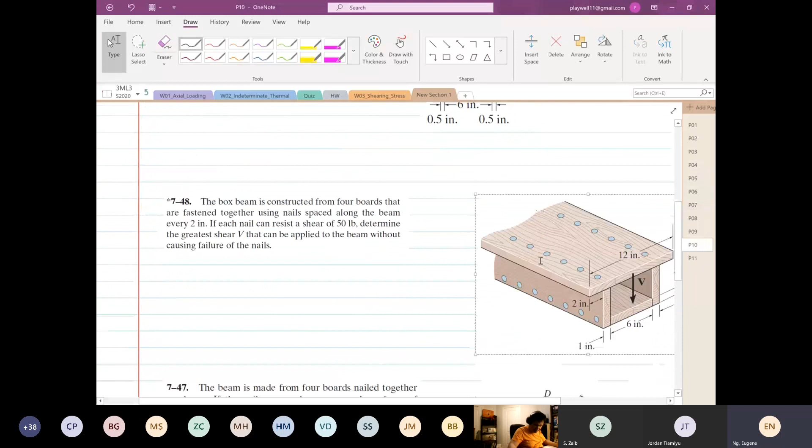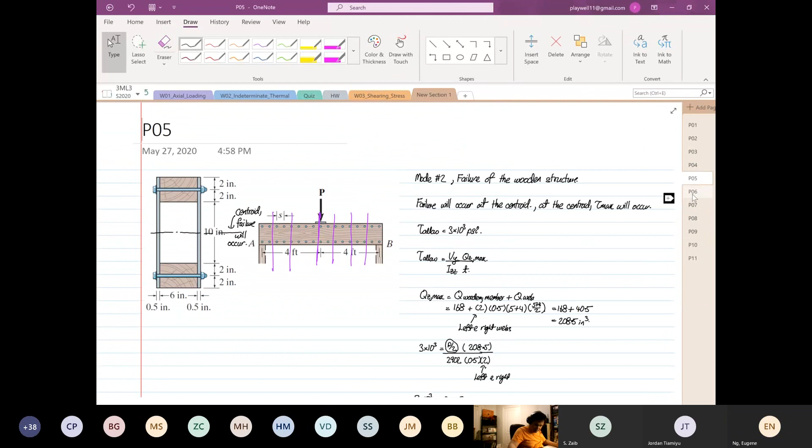Those old textbooks are better than the new ones. The new ones are just pretty pictures, unfortunately. Let's look at another example. Let's look at this one. Okay, let's look at this one. This one's like, whoa.

Eugene, is it okay if you could post practice questions so we could study for our test? Homework are all your practice questions, okay? Does that make sense? Yeah, okay.

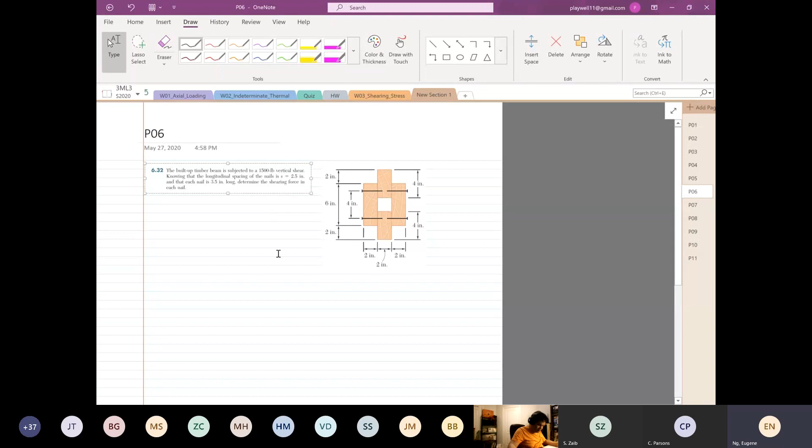Right, so you have this question now. This question states that the built-up timber is subjected to 1500 pounds vertical shear.

Knowing that the longitudinal shear, the nail spacing is 2.5 inch, and the nail is 3.5 inch long. This is just to tell you that the nail goes through the wood. Determine the shearing force in each nail.

Question for you: how will the length of the nail help you? Let's look at experience. I want you guys to know how far it goes into the one in the middle. So what? Is it important? That's what I'm not trying to say.

Really, to know whether it's double shear or single shear. No, this will not work. Also, it's nothing to do with it. Some of you are in civil engineering now, right? So you use a longer nail, a shorter nail.

As long as the nail goes through the part you're holding, you're fine. There's a certain limit, yes or no? There's a certain limit of nail that you need. But if you use a nail that is much longer than the optimum, what will happen? Will it help? Will it stick out? It will not help at all, because what will help is the resistance force.

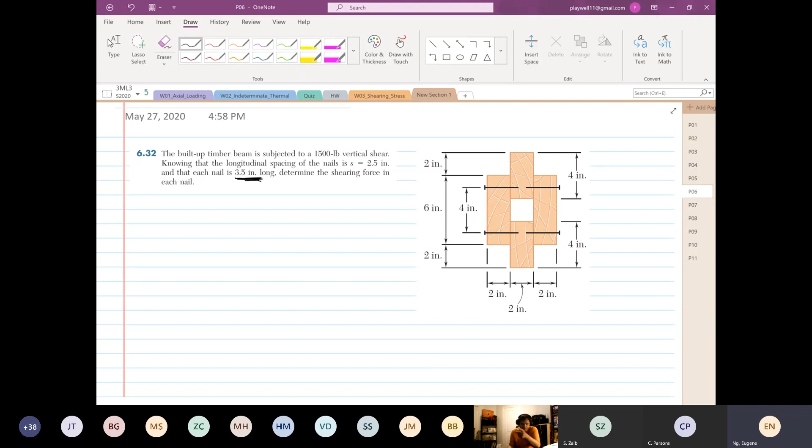As long as the nail penetrates the parts that you're holding, you're fine. You have to make sure that happens. If your nail is not long enough, that's where trouble comes in. So when they say 3.5 inch, we know the nail goes through what? Through the centerpiece also. That's all, it will not help you.

It will not help you in the strength of the structure. It will not help you. Why do I say that? Anyone can point out why do I say that? Why is that statement made?

Show me a formula now that we have applied that has the length of the nail in it. Anyone? Can anyone show me any? None. It's based on the cross-sectional area, and it doesn't matter, as the area is the same. Well done, there you go.

You know what, I did not know that until I taught this. I thought, okay, if this is pulling out, let's go to Home Depot, buy a longer nail. Dum dum dum dum. Does not help. You are better off buying a bigger diameter, yes or no? Yes, there you go, am I right?

Now you are looking at someone that has never built a deck. Most of you have built a deck. Am I right? Yep. Yeah, right? There you go.

That's the beauty of what I hope you all appreciate. That's why I'm so keen on this topic, because I'm seeing things that I did not know when I was an undergrad. I want to transpose all this knowledge to you now, and it's so important. That's the drive, that's why I'm teaching this course and not giving up on any of you.

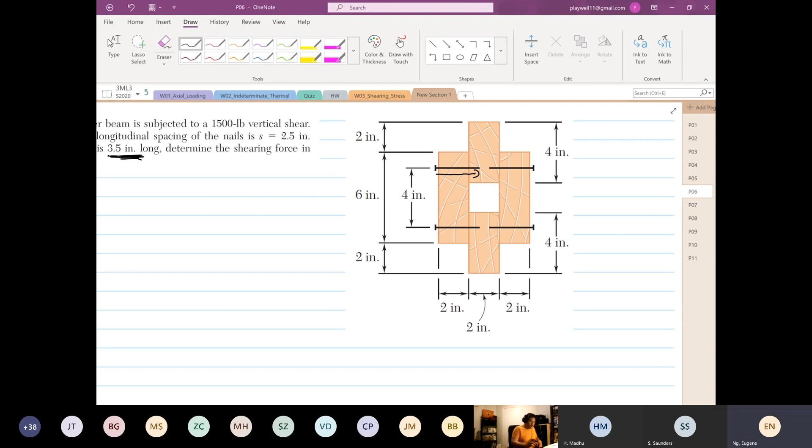Right, so that's why when I seen this question, I thought, what is this? We never had any formula that has the length, but there's an optimum length you need to reach. How to calculate that optimum, I don't know yet.

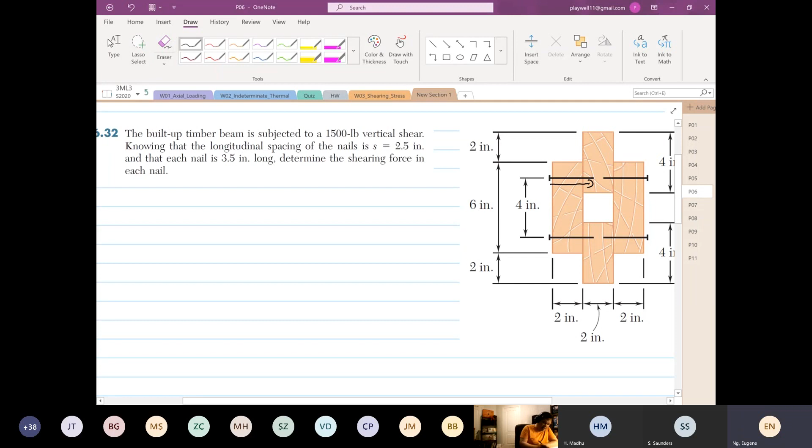So determine the shearing force in each nail. We know that this is subject to a vertical force of 1500 pounds. I'm not going to go through the calculation of the second moment of area, I'm just going to write out the value. I will leave you to calculate that.

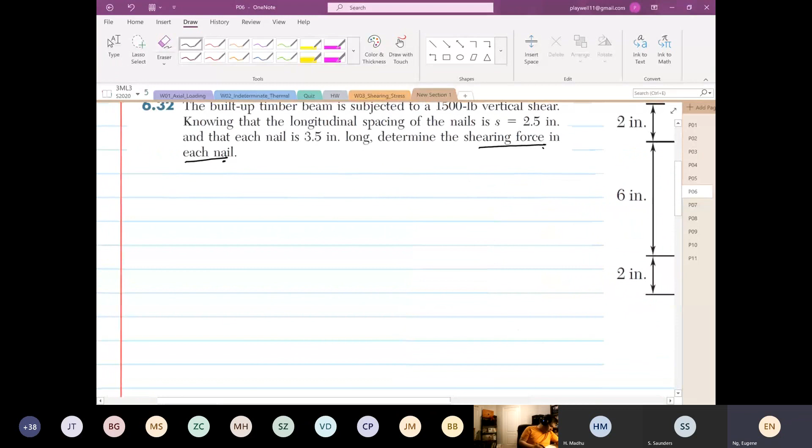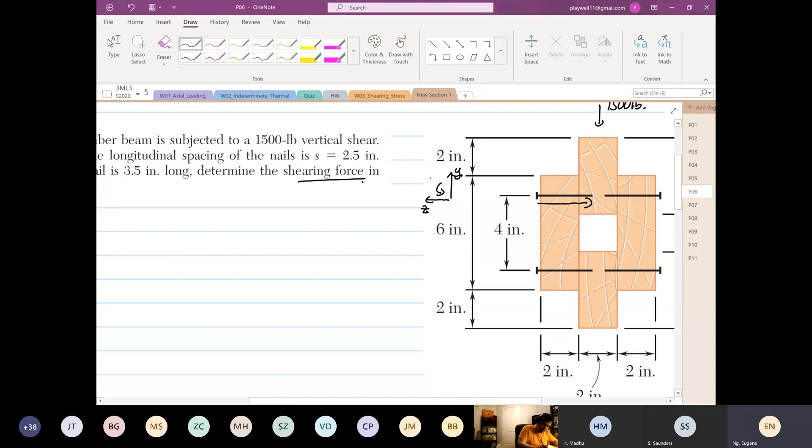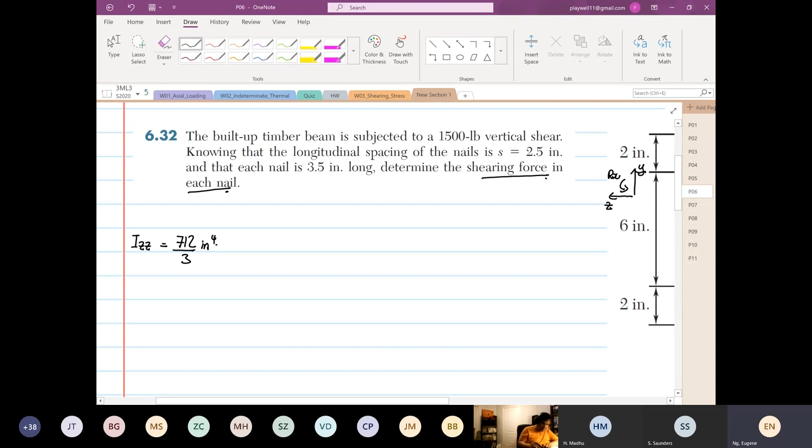So IZZ. Okay, so if we were to use this configuration, this is Y, this is Z, this is rotation about X. So IZZ is equal to 712/3 inch to the power 4. Then this is my centroid.

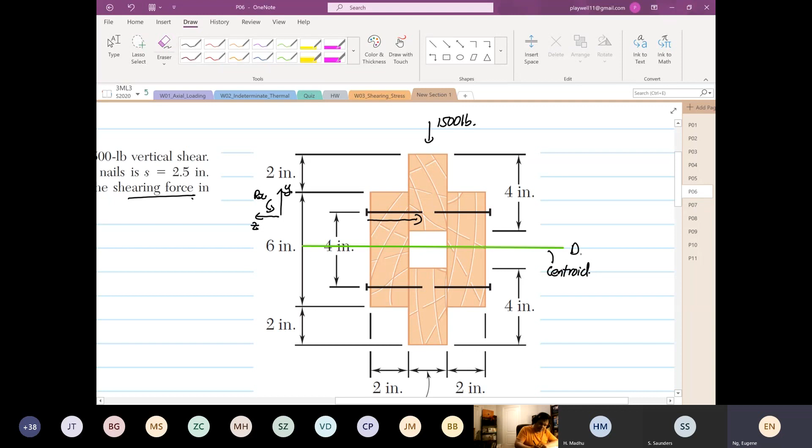That's my centroid, and then this is our datum. This is our analysis direction. Now, question.

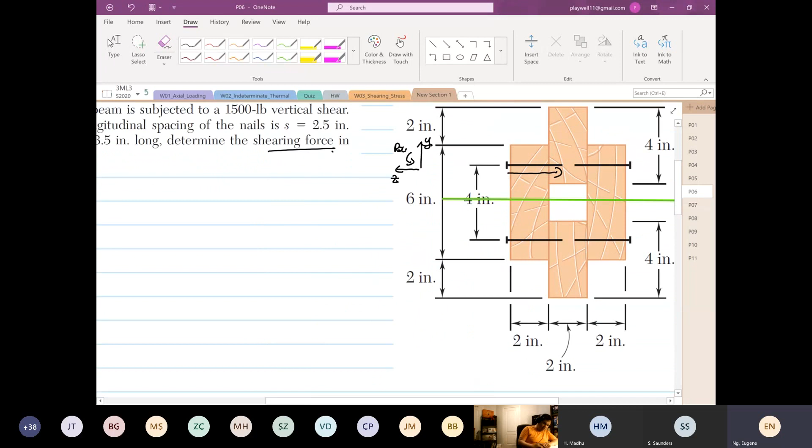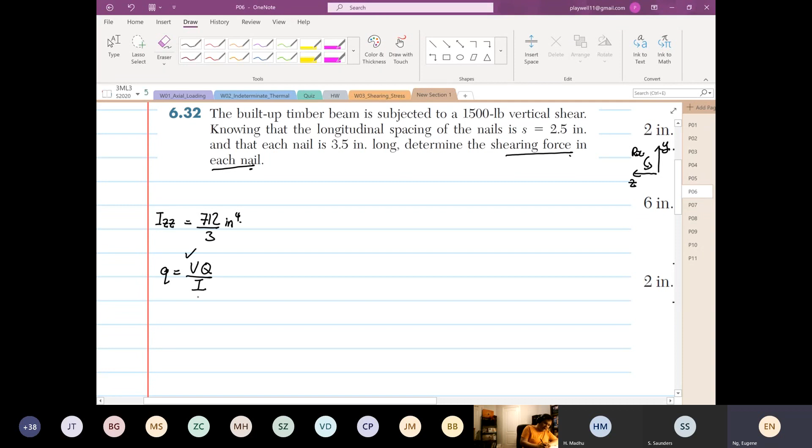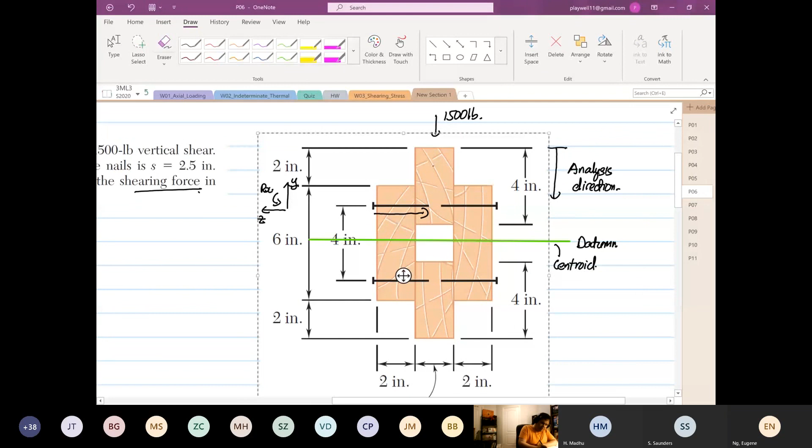We know that the formula is q is equal to VQ over I. V we know, I we know, Q — what is the Q? Anyone? Is Q calculating 1, 2, and 3? What is it?

I think it's only the first. Wouldn't it be calculating one is the flange? Yeah, you are spot on.

Right? Because if the analysis starts from outside, when you move your slider, once it passes here, this area is past the slider already, yes or no? It will become constant. And that is the shear force that would be transmitted to what? This area will transmit the shear force to the fastener. Does that make sense?

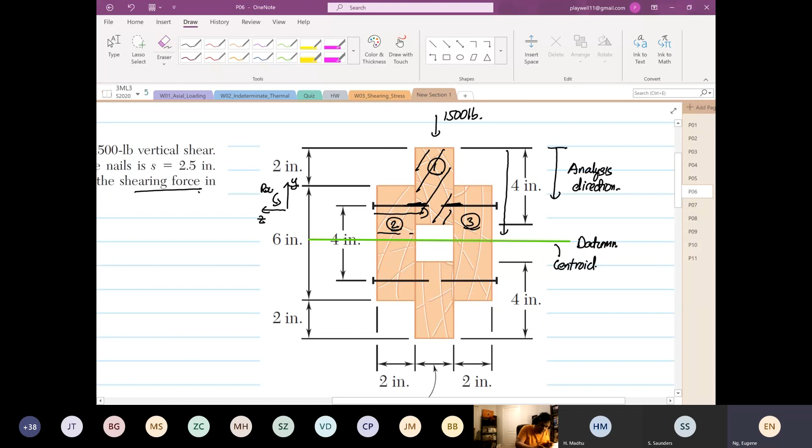Yes or no? If your slider is here, right? If your slider moves to here, you don't need to analyze this at all. Why you don't need to analyze that area is because, let me use a different color. So once your slider is here, let's say now your slider is here, you don't need to consider this area at all. Okay, the area colored in green.

You don't need to consider that area at all because the fastener is the one that's going to transmit the load, and how much load it will transmit depends on the first moment of area of block number 1.

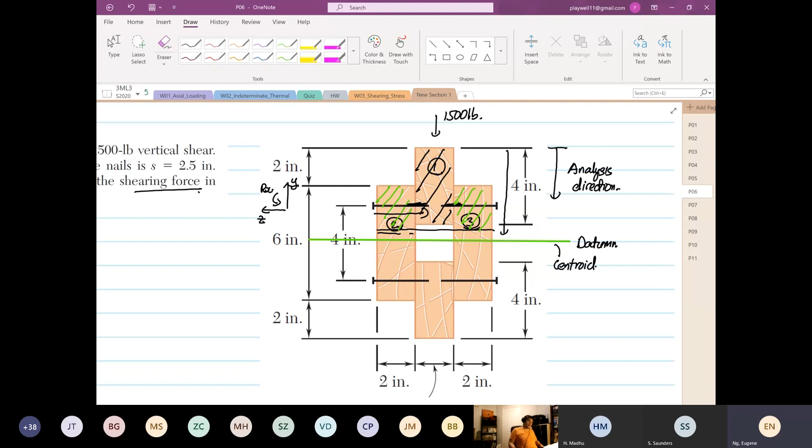So now it becomes simple to you. We just apply rule number 1, 2, and 3. Yes or no? Rule number 1, V and I are constant. Rule number 2, the analysis is from the datum. Rule number 3, the datum is at the centroid. The analysis will start from what? Y max. There you go. You never get it wrong. Okay, that's why I say those 4 rules apply from the very beginning up to the end. So now from here, some of you say, can I show you?

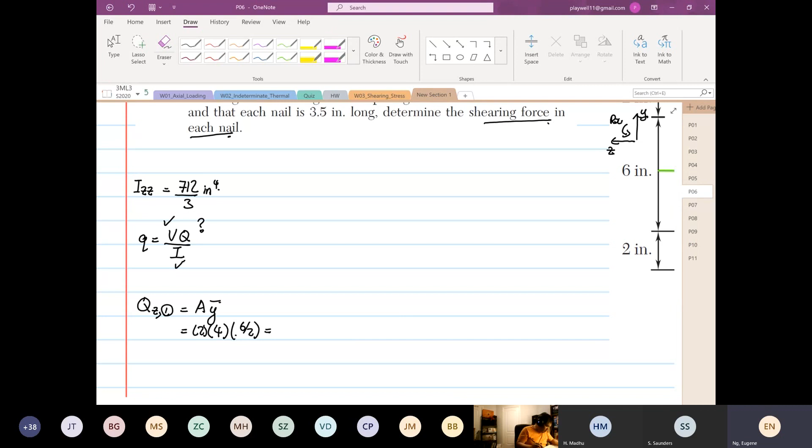Okay, so Q in Z for member number 1 is equal to A Y bar. So the width is equal to 2, the depth is equal to 4, and the Y relative from the centroid is equal to 6 divided by 2 is equal to 3. So 2 times 4 times 3 is equal to 24 inch cubed. So now we calculate Q.

V is 1500. Q is 24. I is equal to 712/3. So Q over here, so 1500 times 24 divided by 712/3, so it's equal to 13500 over 89. Now this is in pounds per inch.

Okay, so I'll do it again: 1500 times 24 divided by 712/3, so it's equal to 13500 over 89. So then the Q will be equal to, let me give more space, the Q

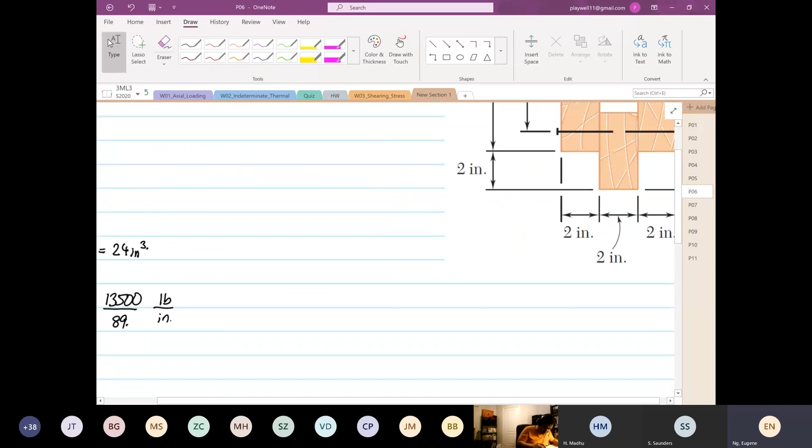is equal to 2, right? So why 2? Because you have one nail over here, 2. So the 2 is for left and right nail. So this is the F, the resistance force of the nail that we want to find out.

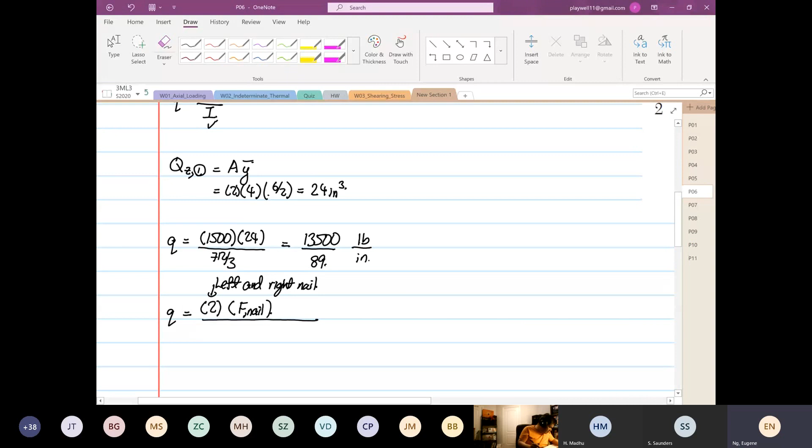Divide by the spacing that is equal to what? Spacing is 2.5, right? So this will be equal to 13500 over 89. So the force resistance of the nail per nail is equal to 13500 over 89 times 2.5 divided by 2, so it's equal to 189.

189.61 pounds of force, or you can round it up to 190 pounds of force. You cannot measure 0.61, right?

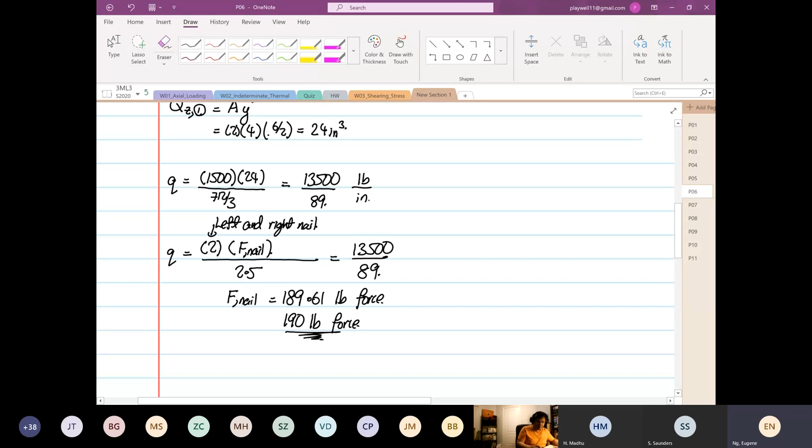You can see, it looks like really complicated, right? But when you apply the rules, it's so easy now. Any questions for this? Anyone?

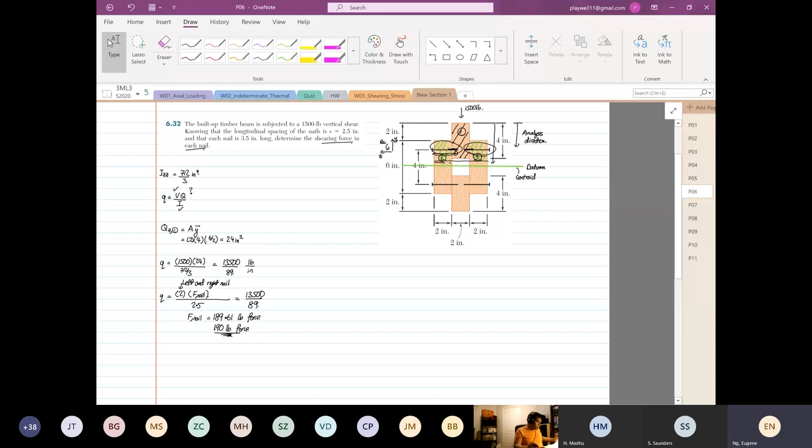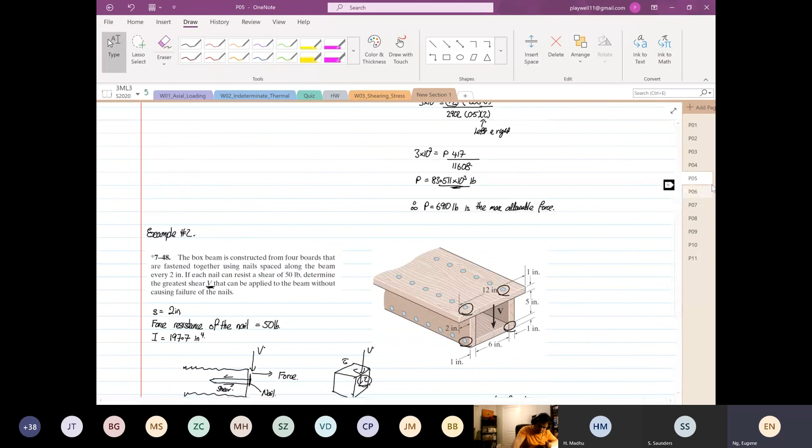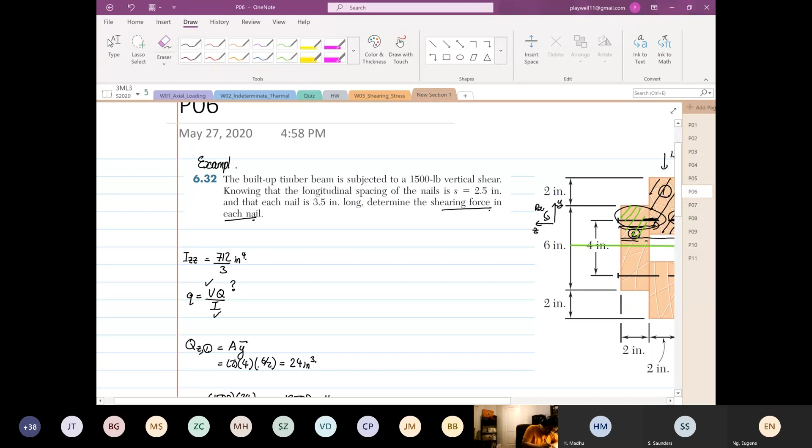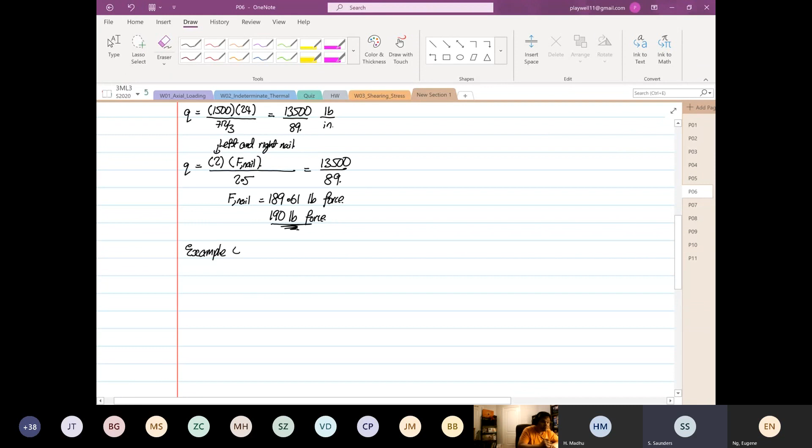Hey Eugene, there's a question in the chat: why is the centroid 6/2? I started thinking about it too. Okay, so why is the centroid 6/2?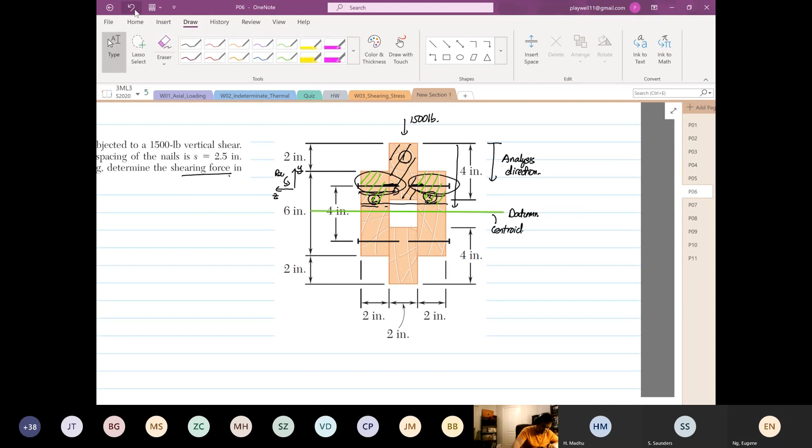So let me get rid of this. I shouldn't have done that. Wait, my bad. Okay, so let me copy and paste. I think I did it too quick. All right.

So when you see over here, right, this is where the centroid is. So the distance from here to here is what? So the distance from, wait, so 6, or maybe I got it wrong. Hold on, did I write it wrong? It is 6. So this is the centroid over here, right? This is the centroid over here for the center bar, right?

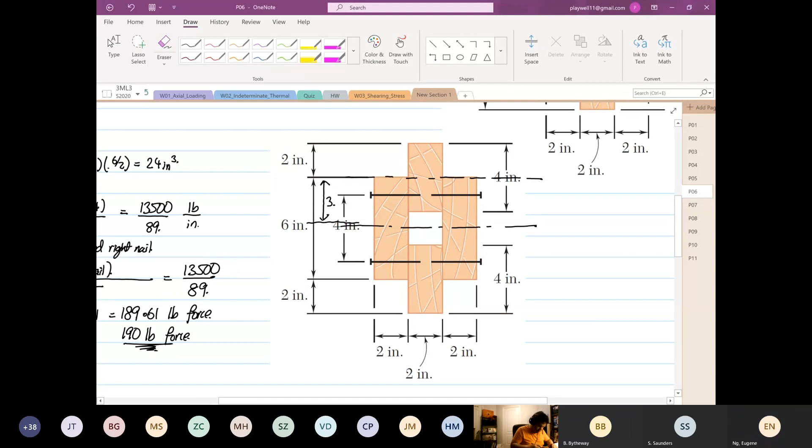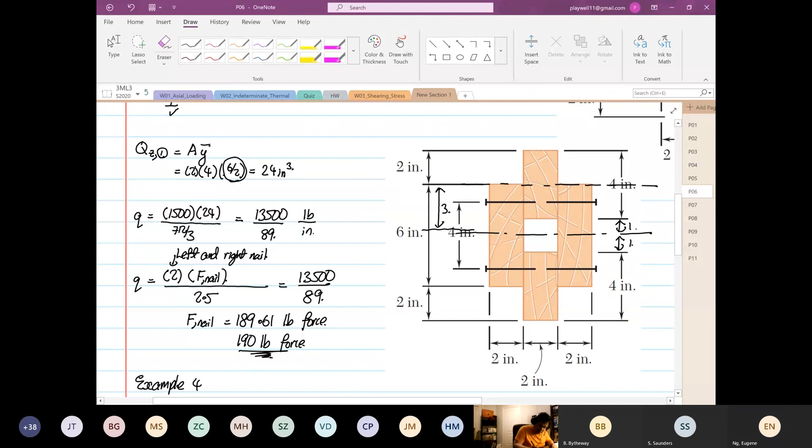So from here to here, from here to here, is what? 3, 3, right? Yeah. So 6 divided by 2 is 3. Shouldn't it be plus the half of 4, so it would be 4? So here to here is 1, here to here is also 1, right? Hello? Yeah, right? So here to here is 2, right? Okay.